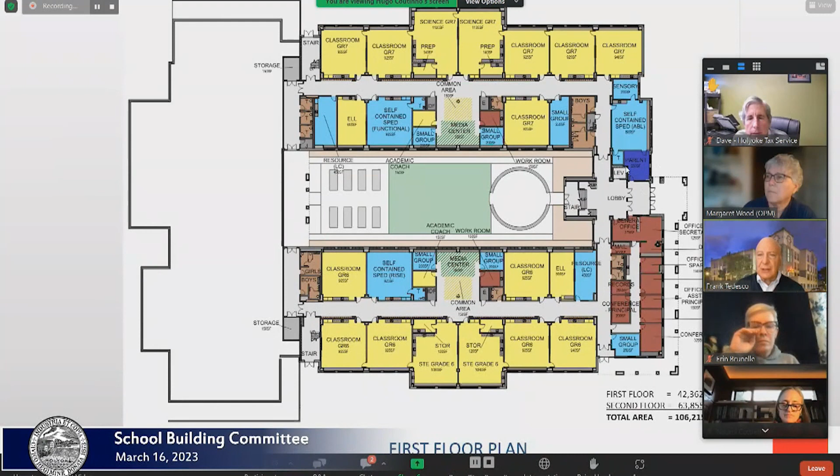I just wanted to clarify, if we add those small conference rooms and so forth, is that going to increase the gross square footage? No. Or the net square footage? It's really like—nothing changes in the plan that you saw. But within that plan, there are certain spaces that are not reimbursable but they're necessary for your program. Under MSBA guidelines, they're not reimbursable—some of the specialist space you have and things like that. Because we have a lower net-to-gross ratio, that differential of about 2,300 square feet...

And he said, don't go right to the 2,300, he said, leave wiggle room. So that's why we're saying about 2,000 square feet of program that would not have been reimbursable will now be reimbursable, because they will reimburse up to that 1.5 as though we had a fully 1.5, which they allow. That's how it's at the bottom of the template. It says 'other', and they explain it, but the only time you can use that 'other', one of the few times, is when you get below the 1.5. It's very unusual because usually everybody's at or even above 1.5. So this is a very efficient building now, even more so than it was, and I think that's a good thing.

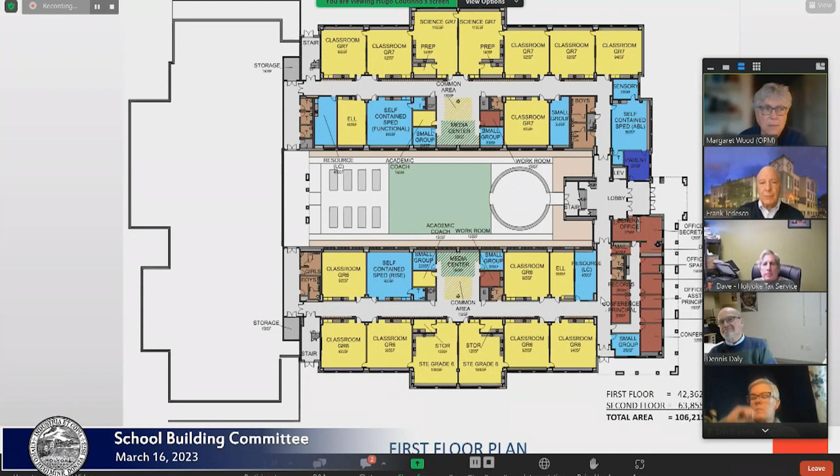Okay, so I'm not seeing any other hands. So Margaret, why don't you carry on with your next thoughts? Well, as we move on, I think it's a good time to ask Crowley Cottrell to make a presentation of the site.

Hi, I'll start here. Just so everybody is oriented, this is your existing plan with Carlton Street to the page left and the Dingle and Beech Street to page right. So it's actually plan north is to the right.

But this is your existing building, and just to orient everybody, we've developed the site plan for this initial phase, to get some pricing on the site work. We want to walk you all through this to see what we've developed so far. So if you can go to the next plan.

So this is the new building on the site. And what you're seeing, a lot of articulation and color and rendering of, is the resultant plan. I'm going to walk you through the plan from the left, again, from Carlton Street to the building.

And then to the right down to the high school. The dotted line and the color inside is the areas of the limit of work and the places that we're actually touching with grading. And part of what's happening here, and you all are familiar with the site, is that the site has quite a bit of grade change from left to right.

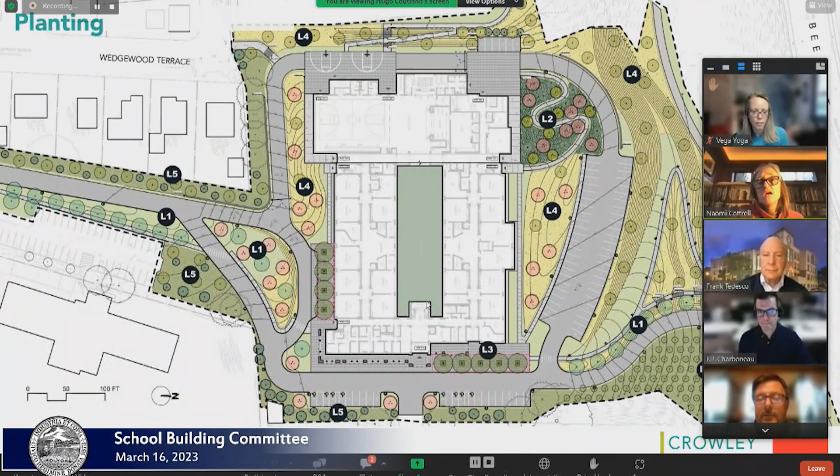One of the reasons we did have the pedestrian lights on that path is because that's an area that without those lights would be kind of dark. The road coming from Carlton will be lit with more of those street light kind of lights, so we don't worry about that pedestrian way, but this other area being part of this larger landscape felt like it needed pedestrian lighting.

That dingle area, can you hear me? Yes. Mark, very good point, and I can't believe we didn't think about that before. But as we go forward, we might want to be sure we pay attention to safety and security in that dingle area, whether it's the blue lights, making it nice and bright, or adding an emergency button—just keep that in the back of your minds.

Is it appropriate now to talk about the bus route, or are we just talking about landscaping right now? No, we could talk about the bus route.

We had a subcommittee meeting the other day to talk about the site plan, and as we're trying to get this in at a certain budget—it's going to be an expensive site plan the way I look at it, and I know we have a limited budget. The intent is to have this great school, and I'd love to have the whole darn thing, don't get me wrong. But is there a way, when putting together estimates, to see if that roadway wasn't there, would there be savings, and would it be worth looking at that?

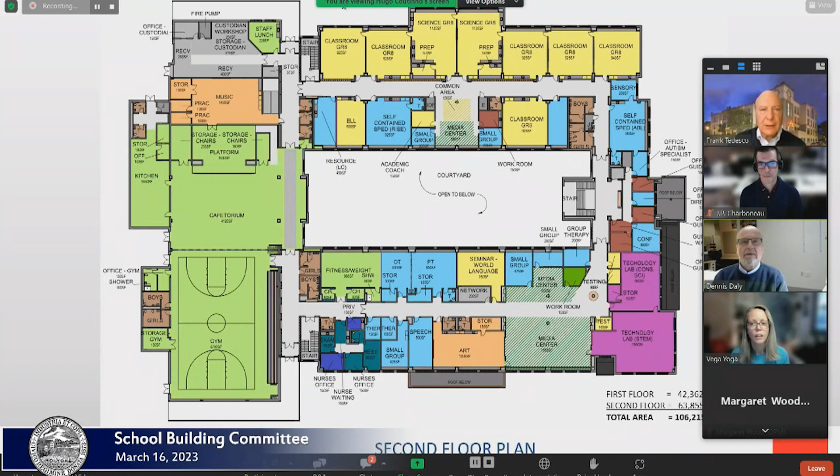So the parking lot would be above here, and then you'd come right down into the building, or you could take the path up and around the back. But I think the gates would be open after school hours, so if somebody wanted to drive up closer to the doorway to drop off, that's completely in your control. Yes, absolutely, we do that to protect during the day.

I think it was an excellent idea by the landscape architects, too, just so that the kids could play safely up there and run around and not have to worry about delivery vans. Now, if a delivery van does come, they would have to drive up and be let into this area in the back. Wouldn't affect the play area.

Frank, where we've located, if you go to the zoom in plan on the next slide, the gate is actually after that court, we're calling it the service court. So really the place that you would open those gates to get to the gym - but the idea is that it's just during the day, so that there's free movement from the gym out. But there are ways to get up there, certainly.

So maybe those few parking spaces that are behind the service area could be designated as handicap for events, because otherwise they're traveling quite a distance from the lot up to the entrance point, since they wouldn't be able to come in the side and use the stairs. So maybe we could have signs that say after 3 p.m. or whatever, those are designated spots for events and gymnasium functions, because it looks like there's at least 6 spots there, more than enough for accessible parking.

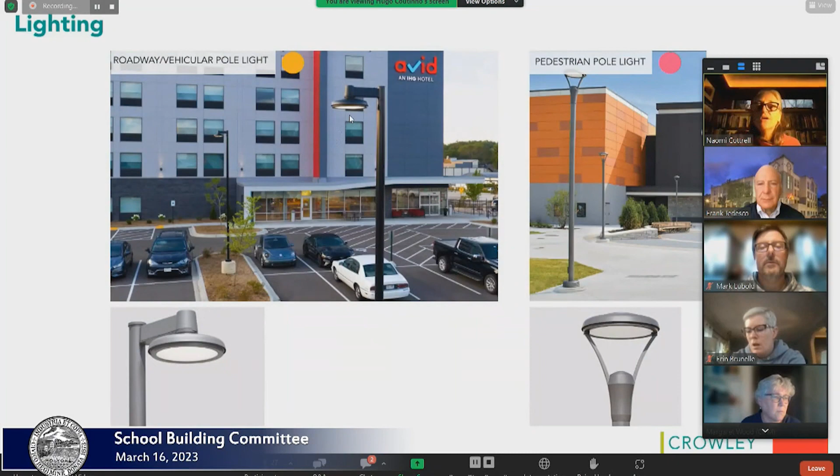What Anya's asking about with dark night sky is that no light goes up, that all light is focused down, and the fixtures we've selected are all down-focused as opposed to out or up. You can see because they're shielded fixtures, it's not like a globe that lights everything, it's pointed down. Again, there are all kinds of options for having a fixture rather than spread out in 360 degrees, to put in directional shielding and other things. So we would absolutely look at that.

She also asks about the safety, which I think the group's already talked about. And she also asks, will an in-depth lighting study be conducted? So I'm assuming you're going to do some sort of metrics of the site when the lighting is set. Is that right? And is there anything else you would be doing?

So typically we're required to do a photometric study. For folks who aren't familiar with that, it's a computer program where you put your lighting fixture and its location in, and it shows how many foot candles of light there are in different locations. So it helps us realize if there are fixtures that are too close together and it's getting a really hot, bright spot next to a really dark spot, and we would move fixtures accordingly to make sure there's an even distribution of foot candles. We want to follow the regulations for the amount of light, so we don't overlight or underlight, and we check that by doing these photometric studies, which would be later on in the process.

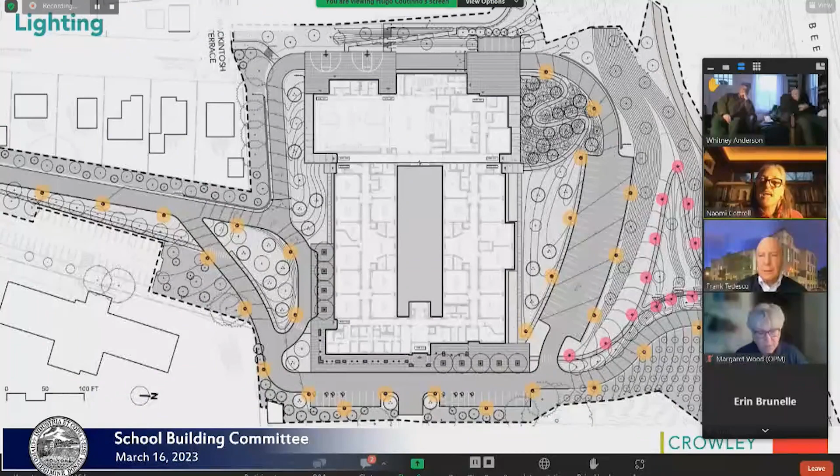We like to add permeable pavers into a site. Just to remind everybody, can you go back to the plan that shows the different types of paving? Forward one. Back one slide, please. Thank you. So the P3s are the places where we were showing permeable pavers.

The permeable pavers are in these locations because they're nicer looking, a step up from just asphalt or poured concrete. We definitely can reconsider them for the backside of the site. We like the functionality of the fact that they allow for some infiltration of stormwater, which helps with our overall calculations for stormwater. I understand this isn't going to be a gym floor out here, so there are definite trade-offs.

It's something we can look into. I don't know how high performing of basketball courts you all want - that's something we want to hear from the school. Maybe if you want handball and other things here too, it's a better spot for a different type of paving up by the courts. I think that's a good thing for us to look at.

Is someone talking about outside courts? Yes, yes. Can you show us? What we've shown here is a typical 3-point key up on the upper left of the building - that's the 3-point line and a foul shot key in the middle. The T-shaped thing at the top is the actual hoop that overhangs, and I think we can move that back, and make plenty of room for a box truck to go by. Our intention isn't that box trucks would go through there often - deliveries would stop at the service area and turn around there.

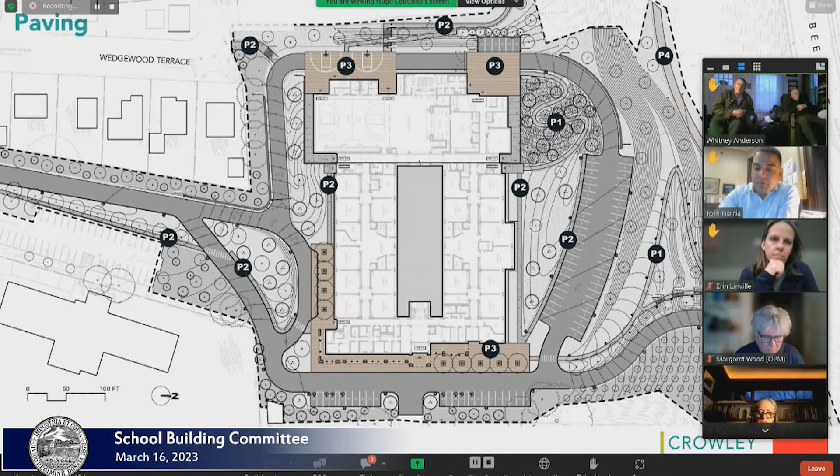The other thing is in regards to snow, and the fact that we like to store it on site as we get multiple storms without trucking the excess snow off the site. So if you're looking at what would be the southeast corner of the vegetation adjacent to the parking area, during our building design work group that met last week, we had discussed moving the parking, if you're looking from left to right here, more to the right, and then putting a vegetative zone all the way on the far end of the parking, on the southern end, so we could dump snow on it. If we had planting everywhere, we got to put the snow somewhere. I don't see a lot of footage that we can put snow, especially in the back of the building. So those are a couple considerations.

The other one, I'm just going to keep going on, and don't expect any great conversation now, but you can integrate it into your thought, is the routing for the actual ADA accessible route, the 1 in 20, the 5% pitch that goes up and switchbacks down again. Is there any possibility of routing that to what would be the easterly or lower portion of this page here, and hugging the side of that hill to take advantage of the natural topography, or are there still areas there that are a little too steep in order to make that happen? In other words, I think we're going quite a distance out there. I think it'll be beautiful, but it's just not a very direct route. So I understand the stairs that come up to cut that short for folks that can handle that. It also builds in quite a challenge for the custodial staff to maintain that. So those are just some initial observations.

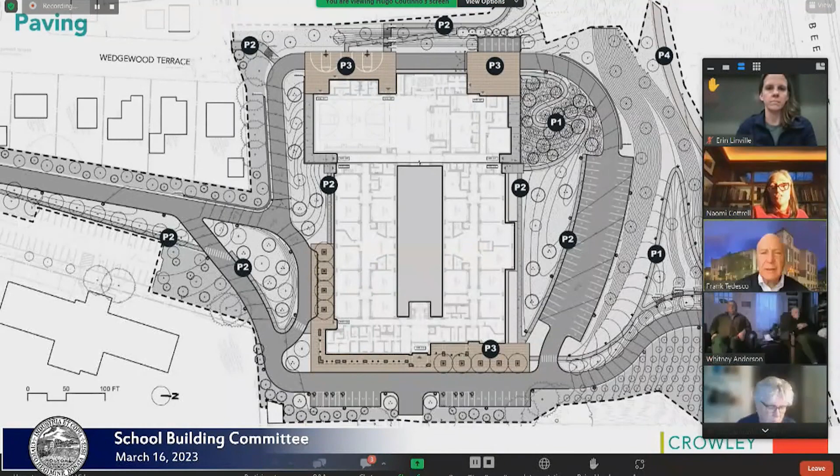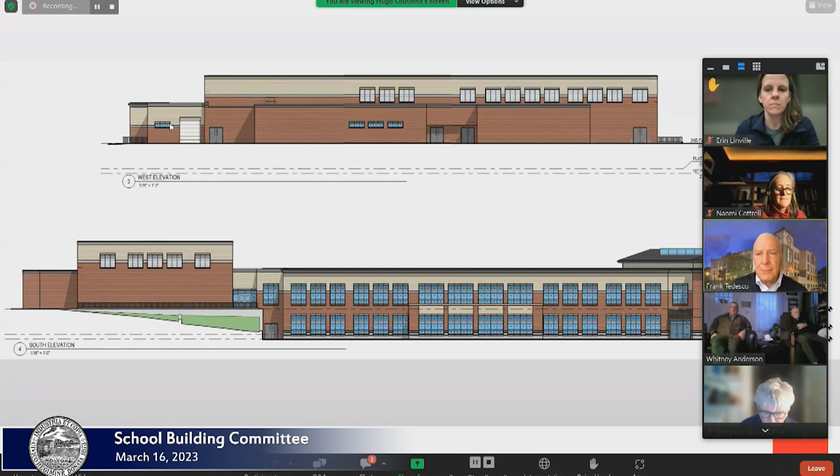Maybe Mount Vernon Group can talk about the loading dock and lift gate, because I can't answer that. Well, I don't think there is a loading dock that you're expecting here, Whitney. I don't think there's any way to get it. I think there could be some kind of ramp system available to go up to the truck just for deliveries, so we'll have to look at some options there.

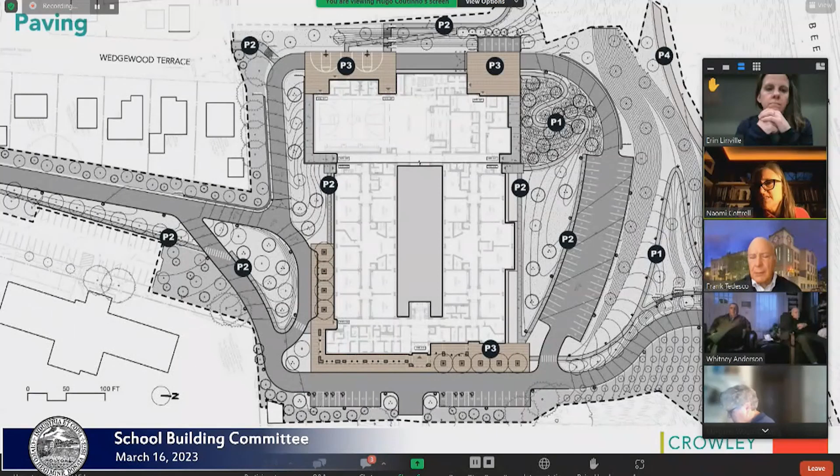I did want to say that the path that comes up from the high school is a long route with stairs. The way in which it's the longer route is the only way to get an accessible path at a slope under 5%. The length is determined by the number of feet we're climbing, so although it seems long, it's really the shortest given the requirement of an accessible under 5% slope. Since we're going up 43 feet, you need 800 plus feet of length to get up, which is part of why it seems so long - that's why we thought providing a shortcut with steps would be a nice feature. But yes, it is a long way.

Well, I think the only other way you're going to be able to do that is if you commingle the ramp with the accessible route - steepen your pitch, bring it up to 8%, throw in railings, resting platforms, and so forth. Right, we try not to do that because that's even more maintenance and expense, so we try to do it without that. Even the stairs option could be extra and could be taken out, but we try to do a path that's really economical, although it's a little longer.

The thing we like about it is how this land would be sculpted, and potentially there would be some infiltration basins and things that really show the stormwater on the surface. It could be a really interesting learning experience on that path, potentially even with some spots to stop on, teachable moments along that, as well as being an accessible route.

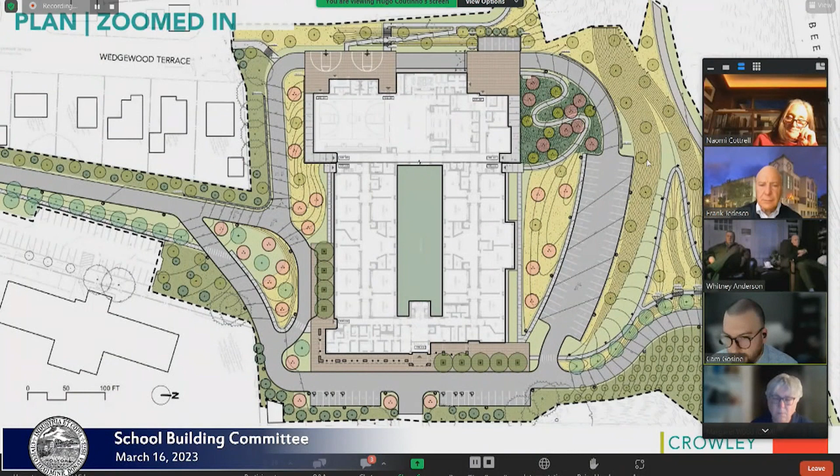Yes, actually, along the bus drop-off area where you see the handicap parking where Chapin Street comes in, there's an effort to utilize the existing catch basins there for stormwater in the event that they are actually grandfathered into being able to discharge to the CSO, the combined sewer system. And there's also an effort to potentially utilize landscaped areas around the building as depression areas.

Not necessarily as surface basins, but maybe just in order to divert stormwater away from the building so you don't have ponding in front of the doors, issues like that. And then those can also potentially collect stormwater. And the one along the parking area, yes, that parking area has another drain manhole there that is connecting to the existing CSO system.

So that, granted, it's at a much lower elevation under existing conditions, but if there's a way that you can raise the rim on that, if the drain manhole is in good enough condition, we could potentially connect into that and utilize that if that's grandfathered in. That's great because that has just been recently replaced in less than 5 years.

And a majority of the water, I can tell you now, comes in from Carlton Street and Wedgewood Terrace. And if you look at the topography there, it rolls right down the primary entrance to the school. Absolutely, that was something I noticed.

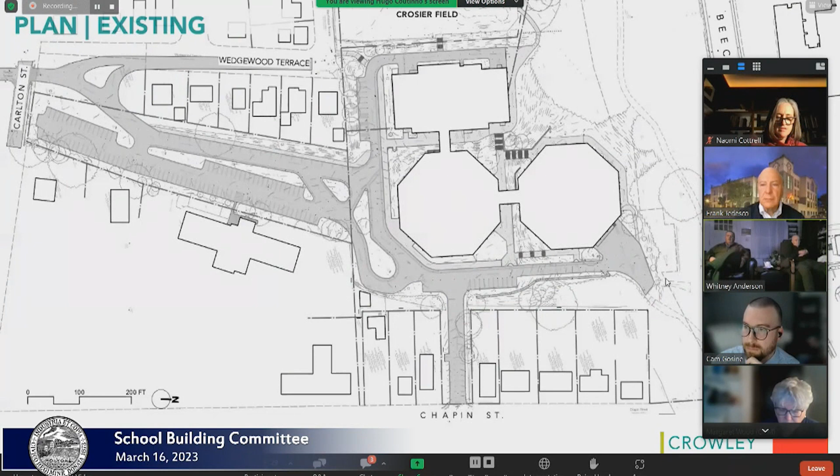The good news is the dingle actually serves as a swale for the Crosier Field, which is pitched towards the dingle. I have seen large trees floating, and also the dumpster over by the back of Holyoke High School adjacent to the cafeteria doing pirouettes during a large thunder shower. We actually have sandbags inside the high school at the thresholds of the doors approaching the back of the kitchen as well as the cafeteria. We've lost half a dozen cars there in a recent storm.

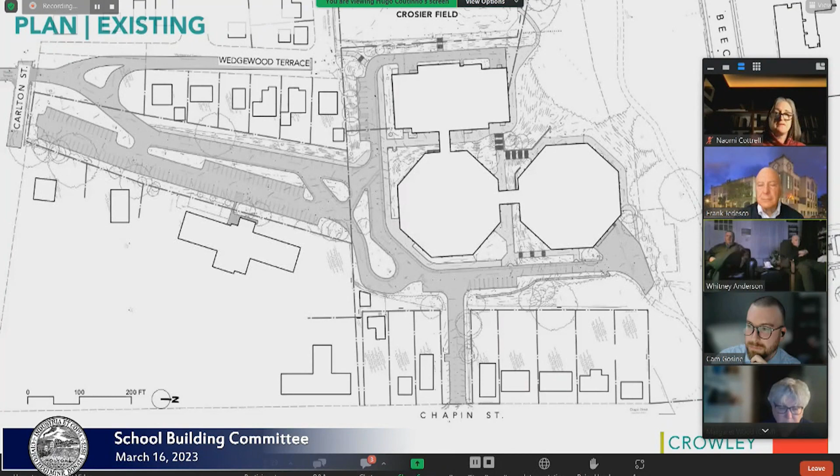Wow, yeah, it's quite a bit of water. And I'm glad you brought up the dingle, because that's actually something we're also looking at, potentially using that for stormwater management, maybe creating a natural basin down there. That's also something we could look at. Absolutely, excellent.

I don't see any other hands on the landscaping. But if there are no other questions, is there more to the Mount Vernon presentation we want to talk on? First of all, thank you, I thought it was a great presentation, you hit on a lot of interesting things. I see a couple slides on the exterior—is that something you want to toggle to?

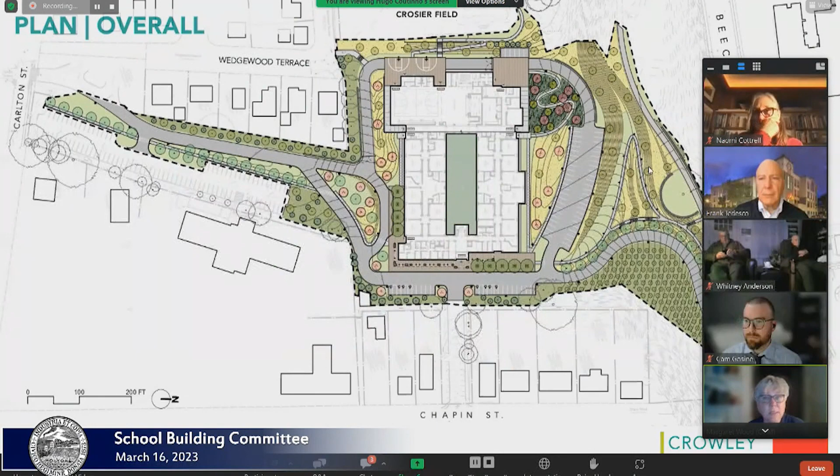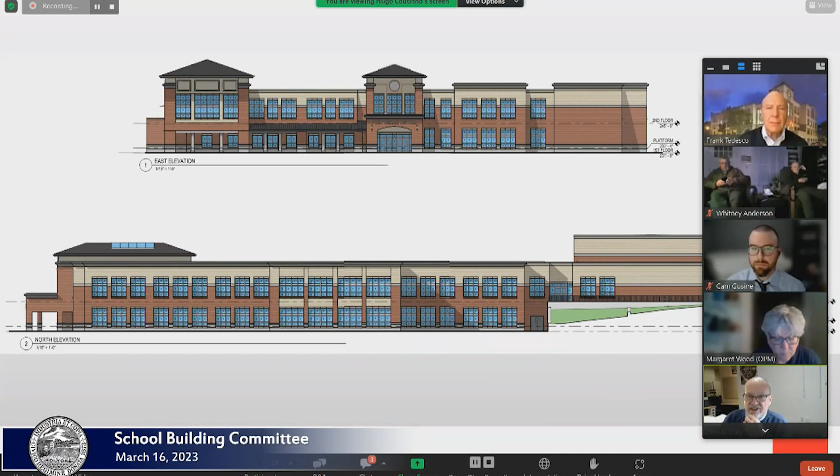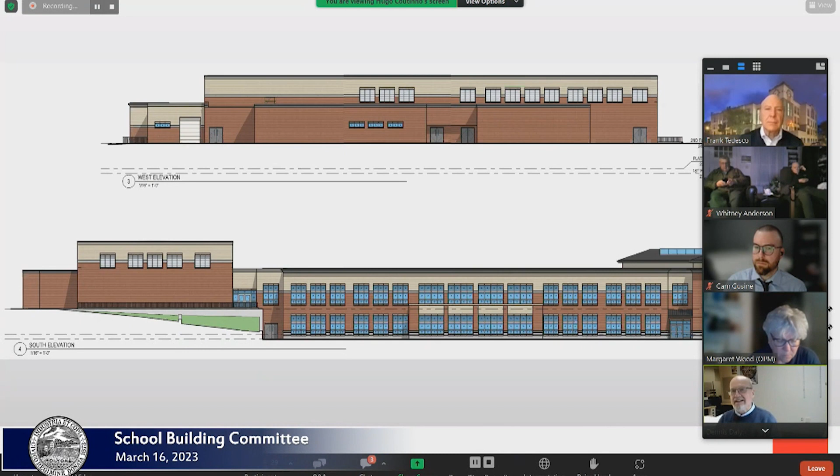Sure, we have some slides of the exterior of the building. It shows the effect of some of the changes we made, all in a positive way. These two elevations remain pretty much the same as the last time you looked at it. However, the other long elevation on the other side has become more articulated in the sense that, by moving some of the spaces around, we were able to create a better entry, which helps the innovation hub area, and the side entry presents itself a little bit stronger. Putting a roof over that and setting it back a little bit helps to really articulate the building, and that's good, because you like to have shadow play and some ins and outs, and this has helped.

We have three-dimensional sketches to show those effects. Those are photographs of how the courtyard works in Marlborough, and we will work closely with you to design a courtyard that will work best for the Peck.

Oh, absolutely, Whitney. Yes, if you look on the right-hand side, you'll see a pair of doors—that is at the stairway, the monumental stair as one enters the building. And when one leaves there, they come to, in this particular case, a round area that has seating all around the edges of it, as well as lighting, that can be used as an outdoor area. I'm sorry, not a play area at all.

In the middle, to keep down the amount of maintenance in the courtyard, instead of planting grass, working with the owner, we have artificial turf, which requires very little maintenance, and all of the planting in there is extremely low maintenance, even the trees and shrubs. At the other end, we have raised planters that can be part of the science program and studies, where students—in this particular case in Marlborough—can raise vegetables and herbs. They also work with the kitchen staff on herbs and other vegetables that they can grow.

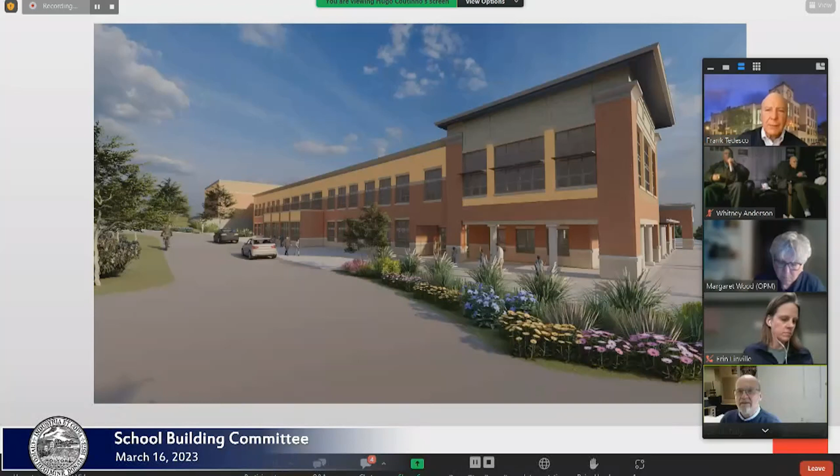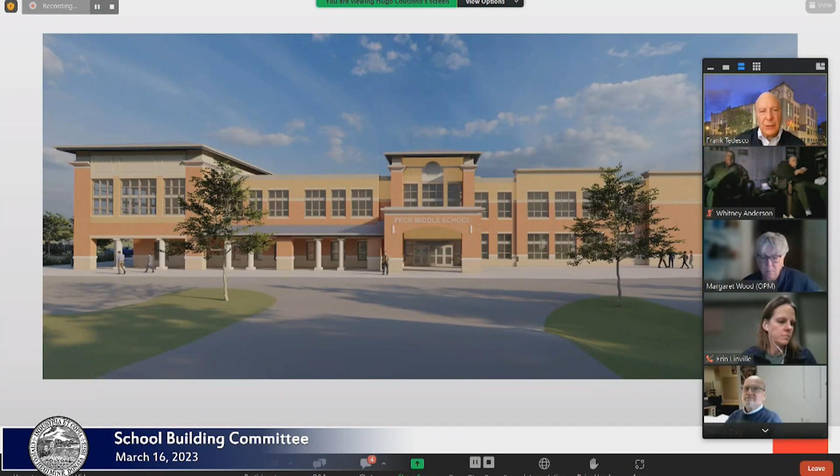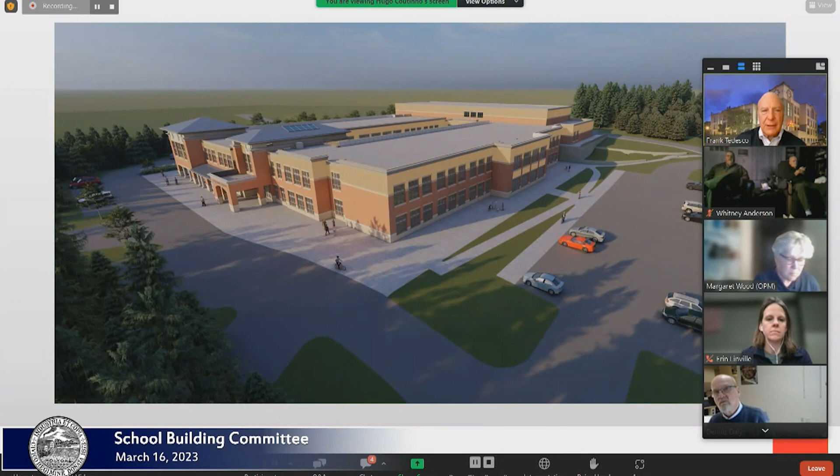It gives a sense of the building, Dennis. Yes, although the changes are pretty de minimis in terms of the look of the building, I think this gives a good feeling for the building and how it would appear. It doesn't have all the plantings in it or what it will actually look like. It's just suggesting that's what it would look like. Okay.

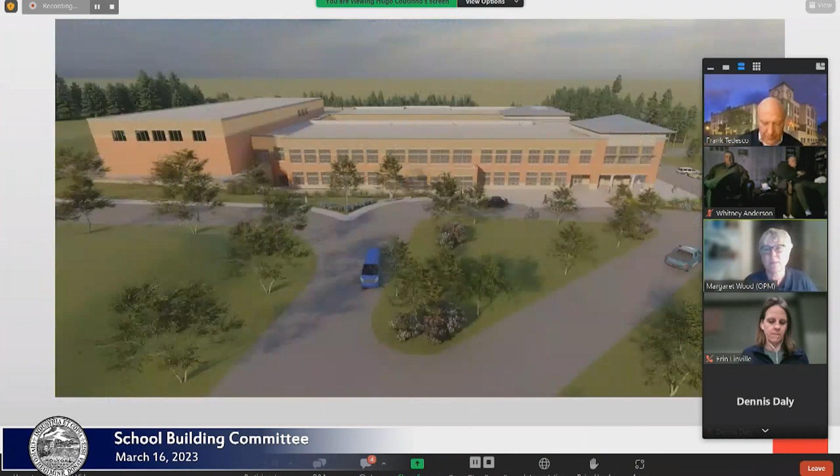Great, okay, so I wanted to just circulate back to a couple things. Erin had asked me by text about the square footage, which is, as we discussed at the beginning of the presentation, a little bit higher than it was for the Jones-Whitsitt design, but less than it was a couple of weeks ago when they first started massaging this.

I guess the question is whether, just to bring up the question that Erin texted me, is whether the committee accepts this, because it is kind of a major milestone in this process. As Mount Vernon Group really starts to dig into developing the plans, it's going to become much harder to change this. So I want to just stop and pause for a moment and say, this is a moment where I think we really do need to be saying in this meeting, yes, or there's more to do.

So Erin, do you want to chime in on that? Yeah, I want to thank Mount Vernon Group because when we were looking at this last week, it was 108,000, and I know that in our ed plan we did ask for a world language classroom, which is 800 to 900 square feet, and a little bit bigger science room, which is 200. So we did add 1,000 square feet of programming. To me, I feel, and I know I'm not a voting member, but I just want to say I really appreciate that when I'm looking at this, we added 1,000 square feet of programming, but the gross square footage is actually only up by 400 to 500. So thank you for that.

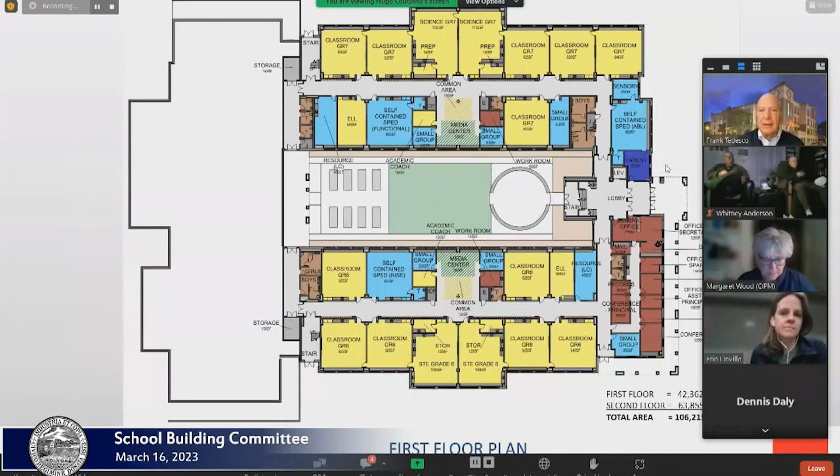Yeah, I think, Erin, too, you missed earlier, we talked about what this actual net to gross ratio does for the project. It's 1.47 as opposed to 1.5. That actually means, and I spoke today with Carl Brown at the MSBA just to confirm, we basically are going to get an additional 2,000 square feet within the existing program that we have that will be reimbursable that would not have been. So that's really a great thing. You're going to get more of your project being eligible for reimbursement, such as those specialist offices and things of that nature, the Katie's Closet and the parents' meeting room and things like that. And we'll go through and we'll be corresponding with MSBA as we complete the template to make sure we get the maximum amount.

I think about 2,000 square feet additionally that would not have been eligible will be eligible because of the reduction in the net to gross ratio. So I think the team did a great job, and I think it's going to be reflected that way. As you can see, great.

Yeah, that was in our ed plan that we had asked how to increase the reimbursement rate on those, and I didn't know that this would be a way to do it, thank you so much. We just confirmed it today. It's in there, a little section that says other, so we're able to do that. We discussed it with Carl Brown, and we will be making sure and confirming everything before we bring it back to the committee, and we're going to max out what will be reimbursed that would not have been because of the extra square footage. They're going to allow us to add up to the 1.5 that would have been 1.5. You're going to see it being reimbursed in that 2,000 that would not have been.

Okay, so I think we pretty much covered all the content we were going to do tonight. Just to look back, Margaret, if I may, I think we should go back to what was supposed to be the first item on the agenda. There were just a few things in there that we needed to quickly go over.